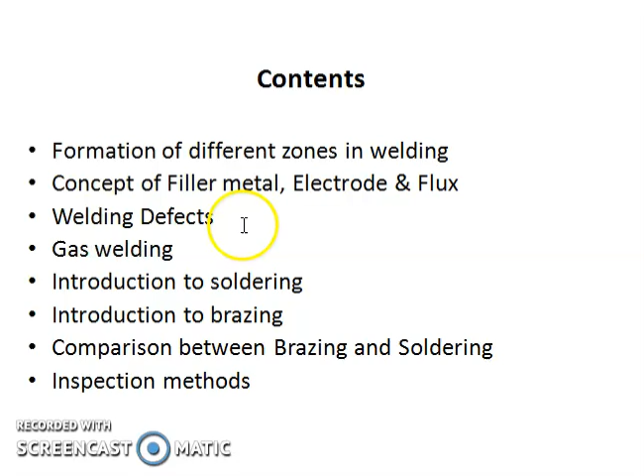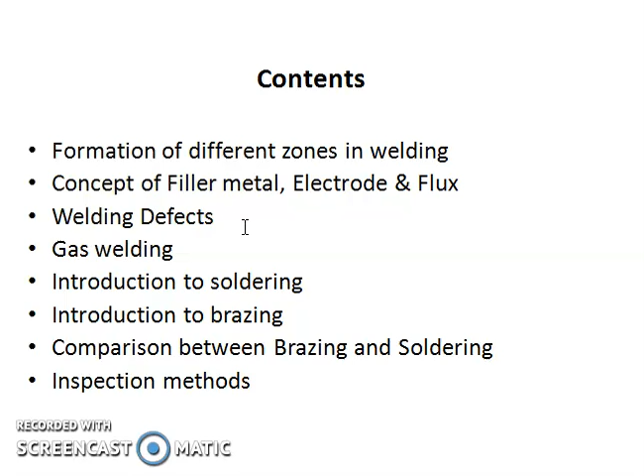Some welding can also be done without using filler metal. In this video, I will explain what is meant by filler metal and the different types of filler material. A filler metal is a metallic wire used to supply additional material to fill the gap between the two workpieces to be joined.

The filler metal is available in the form of a circular rod and is made of the same material or nearly the same chemical composition as the base metal. So whatever the material of the workpiece, the same material of filler metal is required. The filler metal used in the arc welding process is called the electrode. We will see later what is meant by electrodes.

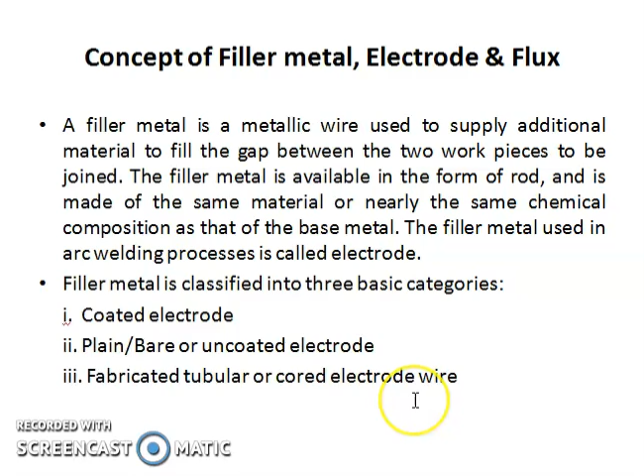Filler metal is classified into three basic categories: coated electrode, plain or bare or uncoated electrode, and fabricated tubular or cored electrode wire. Let's see them one by one. In these three diagrams, the first one is the coated electrode. In metal arc welding, we use this type of electrode. Here, a metal wire is coated with the flux.

The second one is the plain or bare electrode, the wire type electrode. Here, there is no flux coated around the wire. For example, in metal inert gas welding and submerged arc welding, this type of electrode is used. The third one is the tubular electrode. Here, in a circular hollow electrode, flux and carbon are surrounded by the electrode.

The first one is the coated electrode. In coated electrodes, the metallic wire, called the core, is coated with a flux, as you see in the figure. What are the functions of the flux? It prevents oxidation of the molten metal, it helps to remove oxides, and it is used to stabilize the arc. The main function of the flux is to eliminate weld metal porosity. It is also used to minimize welding defects.

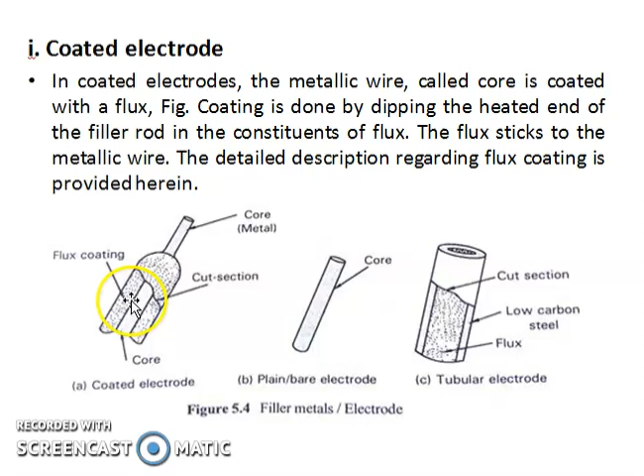plain or uncoated electrode. In this type of filler metal, the metallic core wire is left plain or uncoated with flux. These electrodes do not prevent oxidation of the weld. Normally we use the flux to protect the weld bead from atmospheric gases, but here we don't have any flux. Due to this, oxidation of the weld is not prevented, and hence the joint obtained is weak.

Welding processes that use bare electrodes utilize inert gases for shielding the weld metal during welding, for example metal inert gas and submerged arc welding. In the lectures on these welding types, we can clearly understand what inert gases are, why they are used, and why bare electrodes are used. Bare electrodes allow welding to be carried out continuously without stopping, and they are stored in the form of a wire reel.

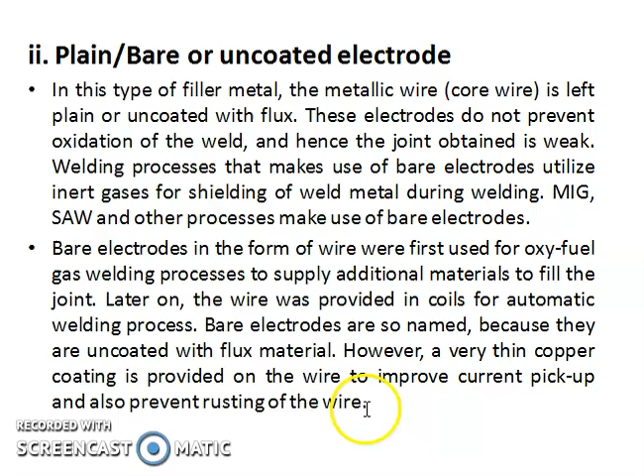Bare electrodes in the form of wire were first used in the oxy-fuel gas welding process to supply additional material to fill the joint. Later on, the wire was provided in coils for automatic welding processes. Bare electrodes are so named because they are uncoated with flux material. However, a very thin copper coating is provided on the wire to improve current pickup and prevent rusting of the wire. This is all about uncoated electrodes.

The last one is the tubular wire, a hollow material containing flux inside, used in flux cored arc welding processes. It consists of a wire made of low carbon steel surrounding a core of flux and alloying materials. The compounds contained in the wire perform essentially the same functions as in coated electrodes.

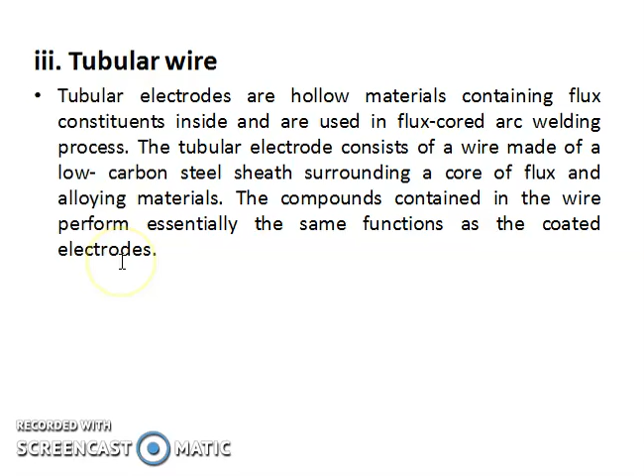Next we see the different types of electrodes. A welding electrode is defined as the component of the welding circuit through which current is conducted. In other words, the electrode forms one pole of the electric circuit while the workpiece forms the other pole. The electrode is connected to one terminal of the power supply and the workpiece to the other. Due to this circuit, the arc is generated between the two components.

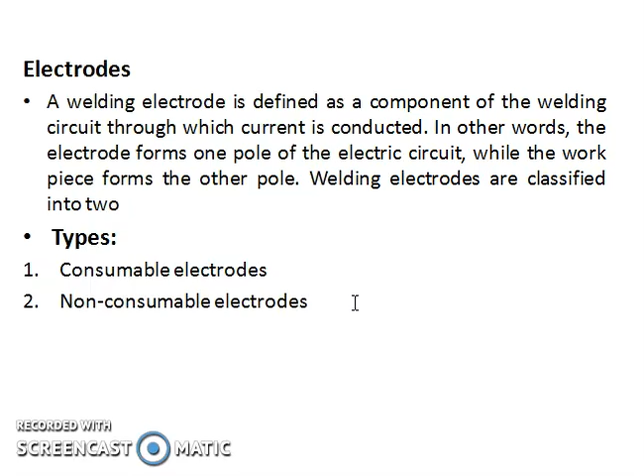There are two types of electrodes: consumable and non-consumable. For example, in the metal arc welding process we use consumable electrodes; the flux burns, fills the weld area and protects it from atmospheric gases. Non-consumable electrodes are used in tungsten inert gas welding. The tungsten electrode is non-consumable, with no flux coating around it. It is only used for creating the arc between the electrode and workpiece.

Consumable electrodes are those which get consumed during the welding process. They help to establish the arc and also act as filler metal to deposit additional material to fill the gap between the workpieces. Consumable electrodes may be coated, bare or tubular. Non-consumable electrodes are made of carbon, graphite or tungsten and are not consumed during welding. They serve only to strike and maintain the arc, for example in tungsten inert gas and atomic hydrogen welding processes.